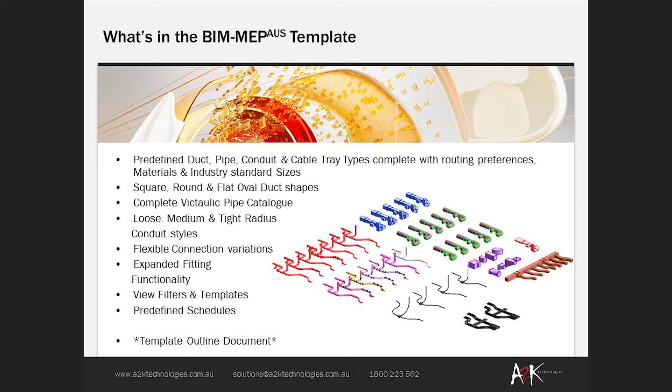We've also produced, down the bottom, what's called the template outline document. So we also have this template outline document which explains how the template is built up, basically. That's something we are continuously evolving and continuously developing along with the template itself.

This slide's just quickly a little bit about how the user groups are working. It's important to note that this content and the template is a collaborative effort, and a lot of you in the room are involved in it. So it's been built up from the input from the industry, from users in industry.

So for those of you in the room that are new to it, just be aware that you can become involved in these user groups. You can see here that there's been user groups set up in different cities around the country, and that feedback gets collated and comes back to us, basically.

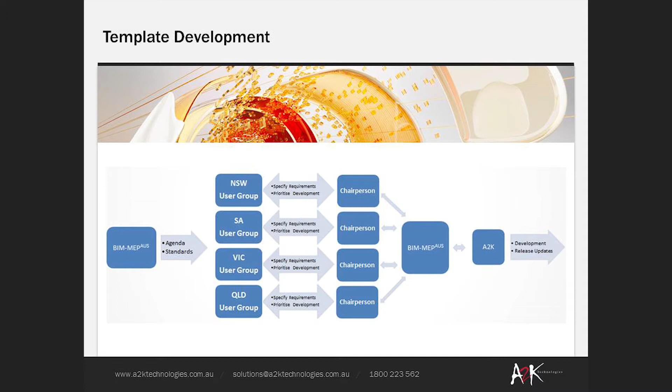We try and act on it as best as we can. We try and prioritise what we can actively and realistically answer at the time, and then those developments and updates should be seen to come into the template.

Okay, so some of these slides you would have seen yesterday in Warwick's presentation, but just to reiterate, some of the things about the template and with regards to generic content, as opposed to what's in the BIM-MEPaus template.

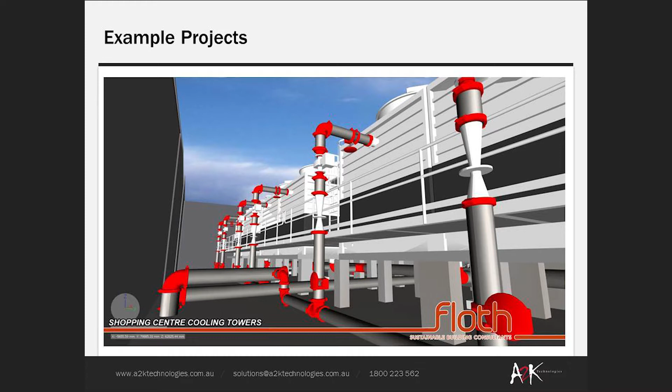Just some examples here of some projects being used now, showing things like the pipe types and pipe fittings in the template, things like the Victaulic projects - the Victaulic pipe types and fittings being demonstrated in some of these plant room examples.

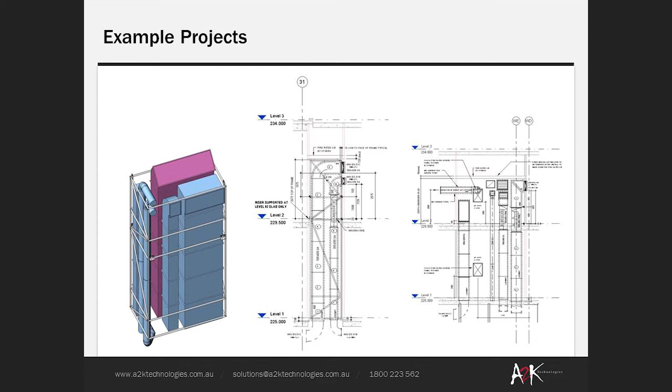So this is another example, again you probably saw a similar slide yesterday. This is another example of a Revit model that was pretty much constructible - built with the BIM-MEPaus Revit kit, the BIM-MEPaus content, and shop drawings are being able to be produced from it. It's constructible, starting to bridge that gap.

So this is just a bit of an example, and Jeff, if you want to have a couple of words while this video is playing.

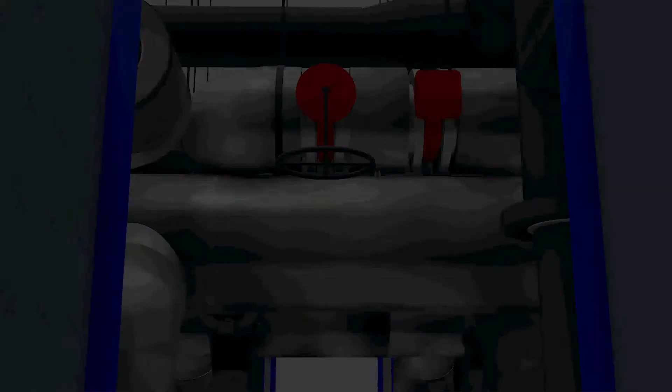Yeah, I think just to go back a couple of things with regards to the template and standardisation - we keep using that word across the board, standardisation. The template really was to benchmark the industry, to bring everyone up to par so you could rely on the information, and it's for benefits within the consultants and contractors area.

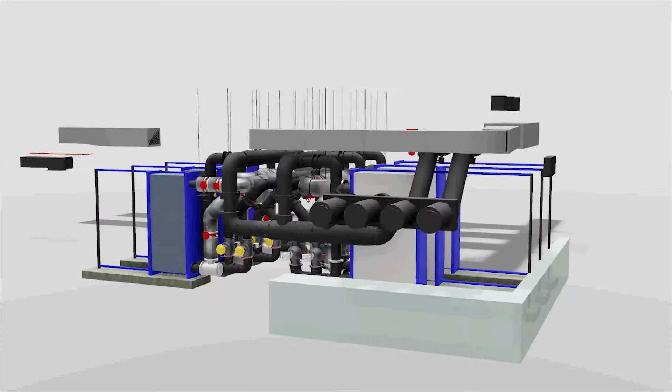So this is sort of an example of where we were at. We had content like this coming from consultants where they'd done design intent, hadn't used BIM-MEPaus, and from this result we had to move on and do our own development. But being able to use BIM-MEPaus and translate that now, we come up with a much better result.

Really, not bragging on anything, but the guys sat down - I think once they worked out the heat exchange arrangement on this using all the content, it took them about an hour to lay out this plant room. It just goes from that conceptual thing to physical space, actual service space requirement, all these little bits in there that even the commissioning team sat down and looked at, and saw where their test points were on the valves and said, this is actually going to work as a plant room now.

So it's a big leap from where it was at to where it's come to, and I think realistically, if we just remember that whole concept behind the template back in 2009 or 2010 when it first started, it was to plateau the industry, give reliance on standardisation across the industry, but it's a benchmark so that we can all build upon that with a consistent approach, using the manufacturer-specific content.

The proof's in the pudding. We can build it, and that's the ultimate goal. And if consultants use that spatially, we'll end up with those results.

All right, so moving along, I'll push through these slides pretty quickly now because I'm conscious we want to try and get a bit of a good discussion going. But just to give you an idea of some of the functionalities, and this will again be good for some of the new users.

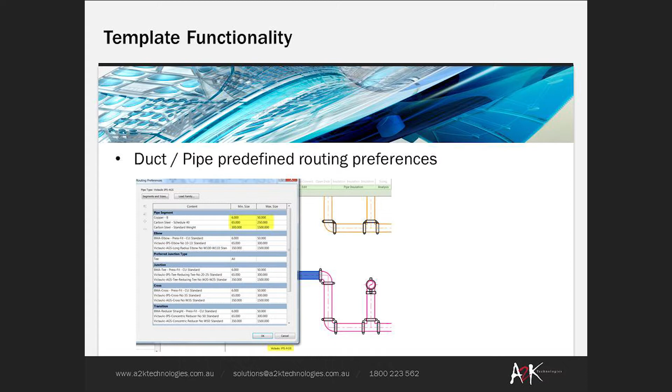Again, an example of the duct and pipe routing preferences and the predefined setup and routing preferences. On the screen here is a good example of some of the work we've done with the Victaulic products, building a hybrid pipe type that's got multiple routing preferences depending on the size, and then the material specified is basically used for those size routings.

Another example of what we're starting to build in is the duct insulation and lining, and these parameters we're putting in to define the types of insulation, the sizes, and to get the hatching.

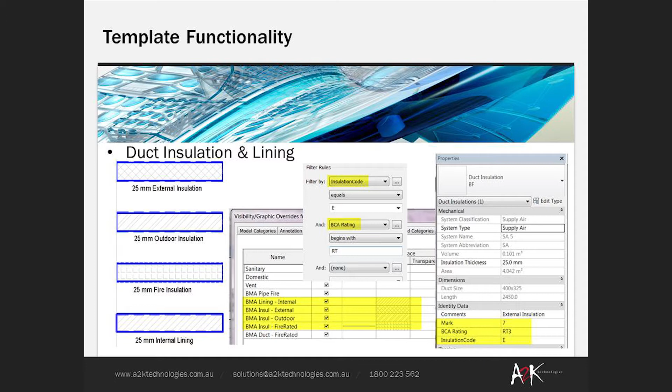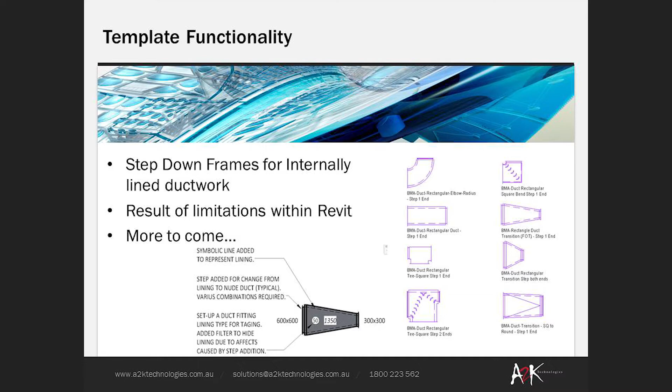So this is another example of getting user input. The guys at Neck Drafting Services have helped out and started to develop a solution for this scenario where we need to have step-down frames in a constructible model. This has come about as a result of certain limitations in the software with the insulation tool, and how it doesn't quite work in terms of how it's actually constructed when you're coming from, say, lined duct work to unlined or nude duct work.

Just a little bit about the content as well. So it's about engagement with the manufacturers, working with the manufacturers that are coming on board now to build their content specific to their requirements and to their specifications.

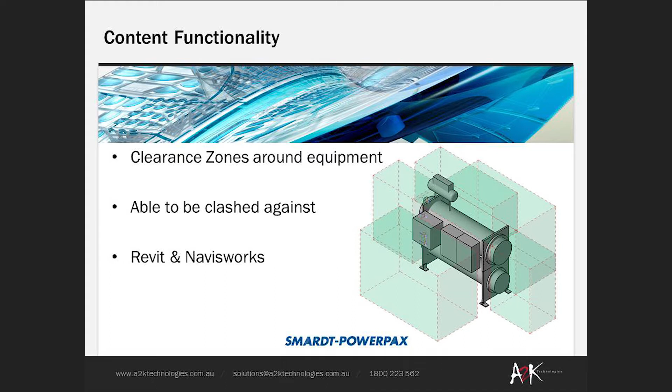Just quickly about some things to be aware of and to take advantage of in the functionality of the content: things like clearance zones, being able to clash clearance zones and turn them on and off depending on plant room access, and using this in clash detection software to actively change your design.

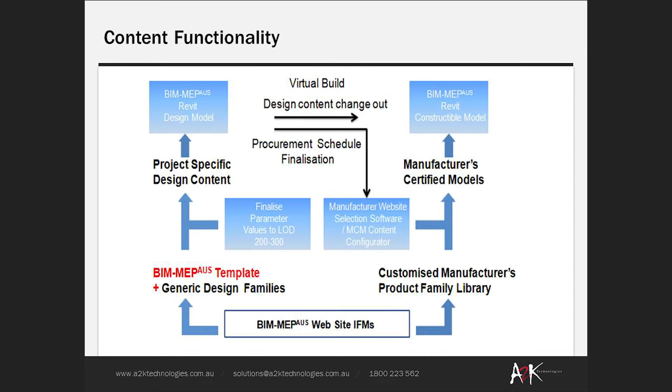I won't dwell too long on this one, I put it in, you would have seen it yesterday. This is some of the workflows being developed with regards to how we're going to deal with generic content and manufacturer content, and moving from a design model to a constructible model.

Who in the room are consultants? How many consultants in the room? So I'm asking you guys directly then: legality-wise, using manufacturer-specific content, would you use generic versus manufacturer-specific? Do you have any issues with that? That's a prickly question.

Usually just use manufacturer specs. A hand up - if you had manufacturer-specific, you'd use it. We have a problem with that because we have to go to numerous suppliers to get a price. But I agree with Brendan's idea of building the content and having an LOD version in the build. So you're using manufacturer objects - that just happens to be generic, stripped down data-wise, and there's a number of different approaches.

We're getting right in the middle of it, but it's a key aspect because we are looking at foundation families based on a generic approach to suit the consultants. I talk to a lot of guys around the traps, and they say if you gave them accurate information they could represent it, but it's usually at the management level that they have an issue from a legality standpoint.